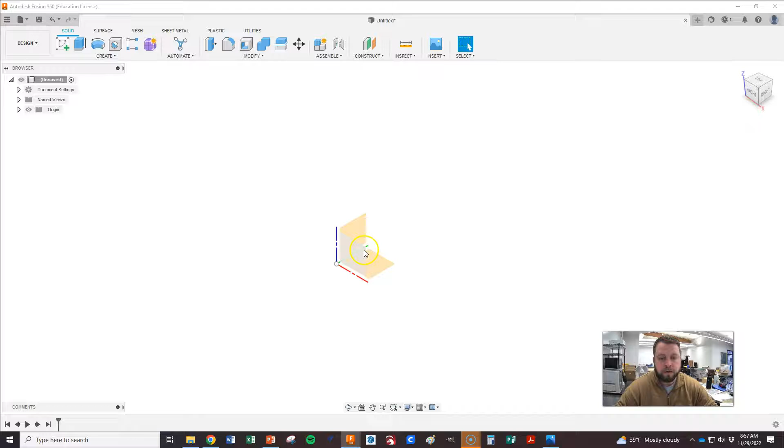It's eventually going to get extruded to 80, but for now, 150 by 20 and 60 by 20 are my rectangles I need to worry about. So I'm going to go right here. I've got my origin turned on. I'm going to right click on this front face, and then hit Create Sketch.

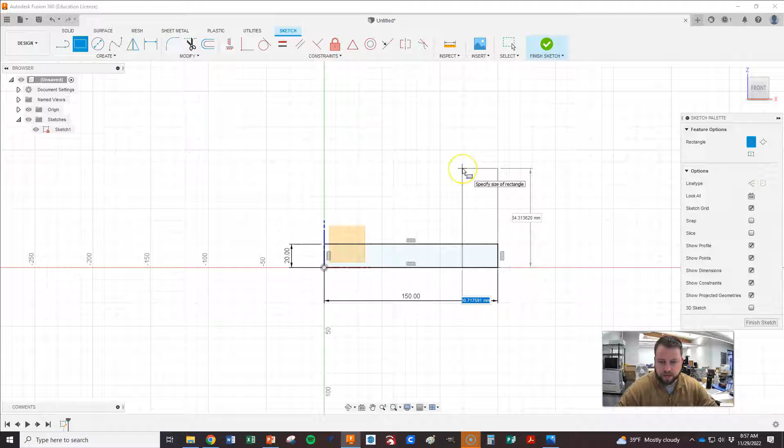Let's do a rectangle, so I hit R. Start dragging it out, I hit 150, then Tab, and 20, and Enter, and that locks that rectangle in. I'm going to right click, go up there to hit Repeat Rectangle. I'm going to go to this corner, start dragging it up, 20, Tab, 60, and Enter. Now, could I trim this out? Yeah, sure, but I want to start showing you guys some other things.

So I'm just going to hit E right there, so I'm ready to extrude that. And I can just click those, even though they're a little bit different, right? And then we'll go to Symmetric. I want the whole distance, and my whole distance is going to be 80.

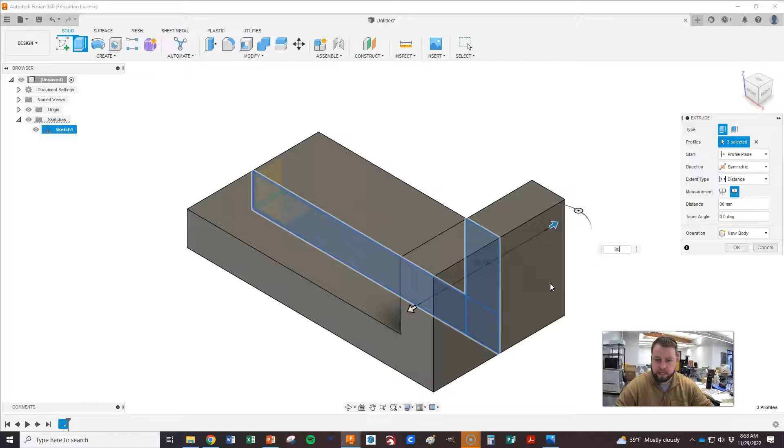Alright, now we got this thing started. Let's go ahead and put these circles here, and then these radius. My radius is 20. So let's go ahead and put our fillet on that, and that, and we want those at 20.

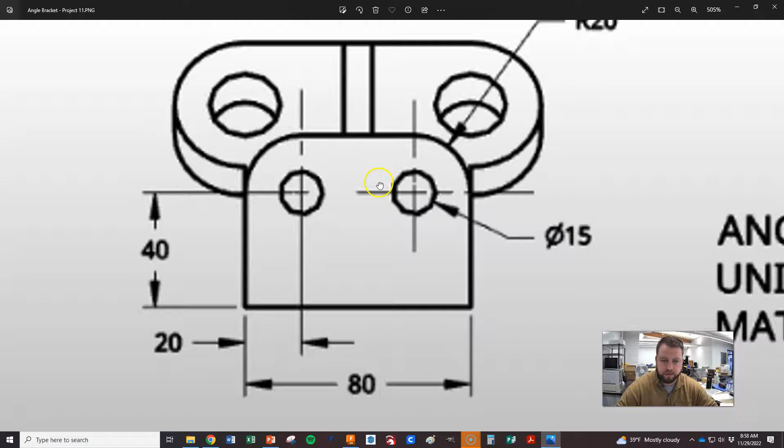Enter. And now we're going to need to create a new sketch for these holes right here. And the center point of these holes is at the same center point for this radius, right? They share the center point. So that would be right in there.

So now let's go right here, right click that, and create a sketch on that. And I want to do this, but what I wanted to see is, that's what I wanted to pop. If this didn't pop up, I was going to have to project that forward. But we're good. So that little circle there means that that's the center for those radius, those fillets we made.

I'm going to click that. Alright, I'm going to hit D for dimension. And those, what did we say, are 15.

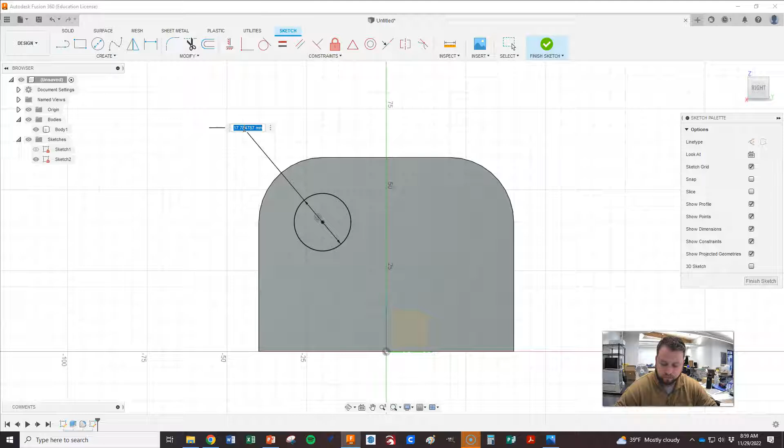Okay, and then I'm going to hit C for circle. Draw this one over there. And then I'm going to say I want U to be equal to U. And now I can hit E for extrude.

Get back in this view. I want U and U. And we're going to cut those out. So I can just hit all.

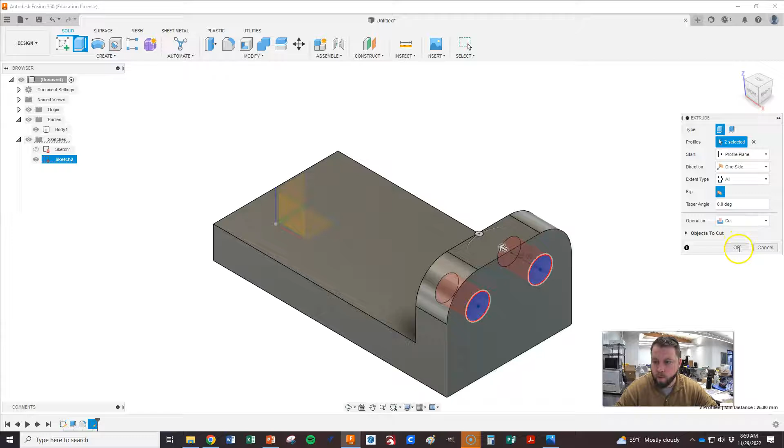And we are good. Okay, now time to worry about this whole kind of back angled piece of this. So for now, I'm just going to worry about this 60 degrees, and then we'll come in and draw it here a little bit later.

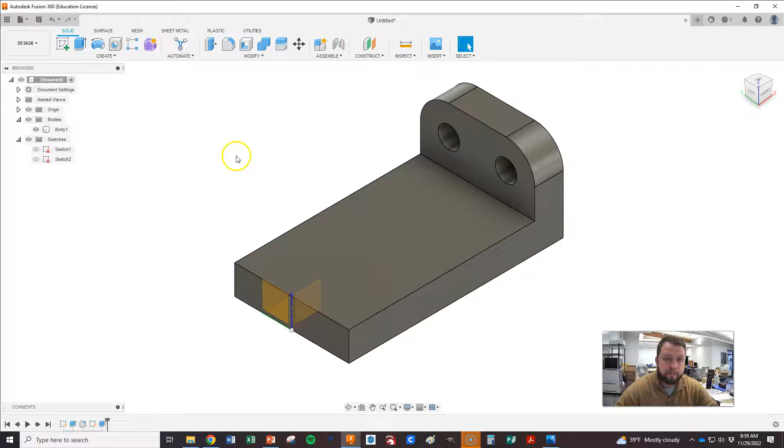And from here, I want to get so I can see the back of this. So I'm just going to click on this corner of my viewing cube. And now we go up here to construct plane angle. And we want it from this line.

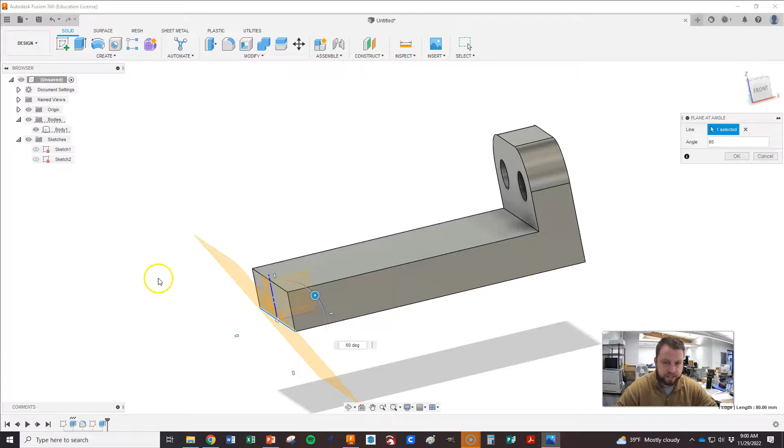And if I just kind of take this and hold shift in my scroll, just so I get a nice little side view of this plane. So I'm going to start changing this angle. It's at 60, but I want to make sure it's the correct way. So that is absolutely what we want. Let me double check that. 60, yes.

Alright, so then we want to take the surface. I'm going to right click it and create a sketch. So now I've got a nice view of this exactly how I want it to be, and now I can start drawing this angled surface.

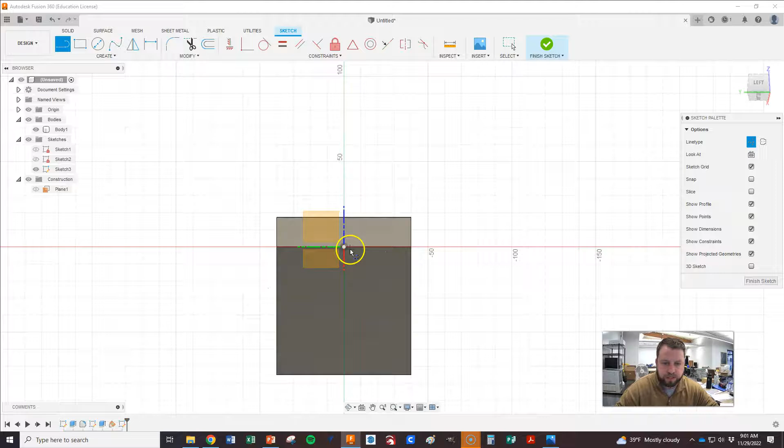95 up. So let's hit a line, and we'll make it a construction line. I'm going to start in the origin there, and I want to go up 95, and hit enter, okay? And now I'm going to hit line again, but I don't want a construction this time. Go over, and I'm going to—oh, see, that's not working right there. So I hit escape.

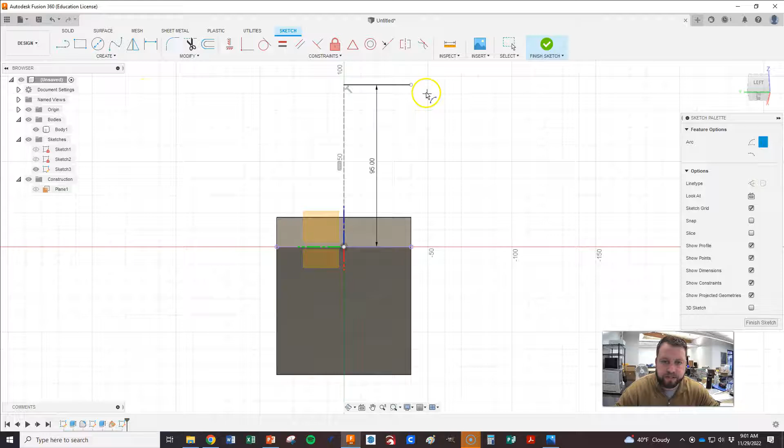And then I'm going to hit create an arc, and I'm going to use a 3-point arc since I don't know where the center point is exactly. I know I want it to start here, and somewhere down in line with this, straight down. So I'm just going to click somewhere for now, it doesn't matter where. And I'm going to pull this arc out until it snaps tangent to that top line, right there. That little symbol that pops up is what I want.

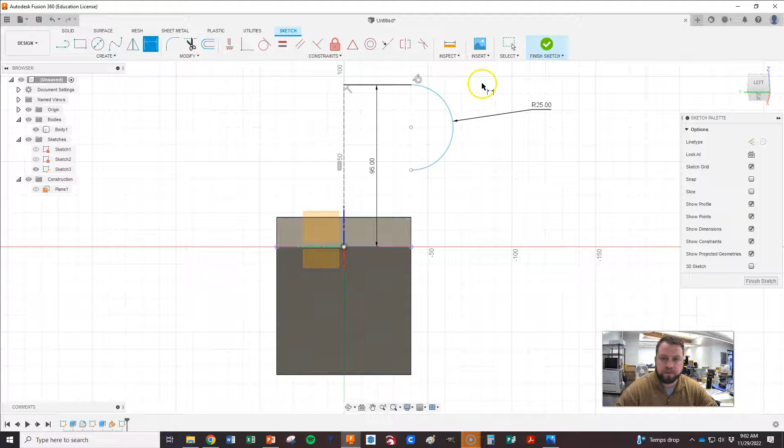All right, and then I'm going to hit dimension and give this its size. And that arc is a radius of 25. Enter. And now, I think I could still move this if I wanted. It doesn't know where I want it to be yet.

And I want all this in line here. So the first thing I want to do is tell it: this and this need to be vertical to each other. So that's now locked in place. Well, I could still move this, I believe.

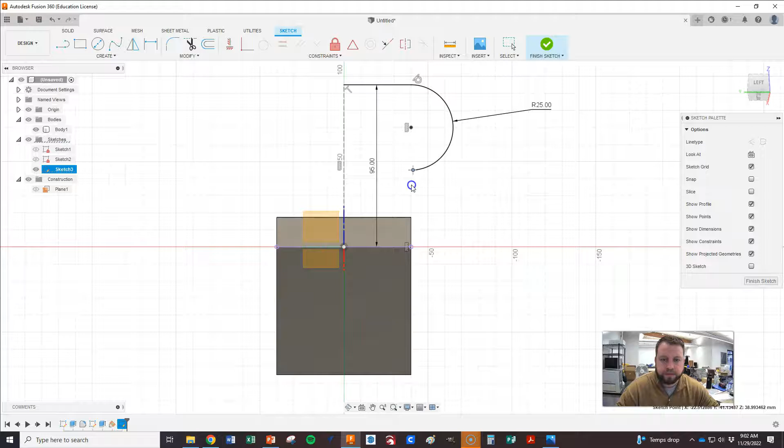Okay, so we're just going to take that in there anywhere. I'm going to hit my line, come straight up till it touches, hit T for trim, and snap that off there. And now we are good to go on that shape, and I want to mirror this over, but before I mirror it, I think I'm going to go ahead and draw that circle too.

That shares the same center point as that radius we just made, and it's a 25 millimeter diameter. C for circle, 25, and enter. Great.

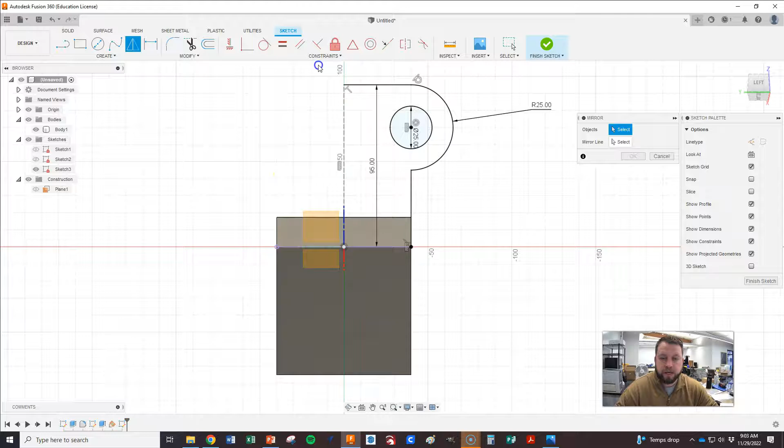We're here to mirror, and I'm going to drag it over all this stuff. I don't need this though, so I'm going to just double click on it again a second time, and it deselects it. Now for my mirror line, I'll go back and hit that construction line, and everything is good there.

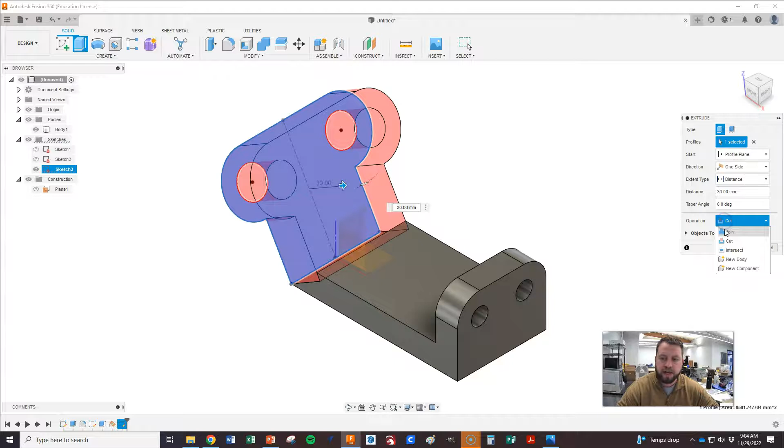So we can hit E to extrude that, bring my view back around. We're going to bring that up, and right now it's red, which means it's cutting it away. We don't want that. We want it to join in with everything else we're doing, and that is the same thickness as our other extrusions we made for the rest of the body, and that's 30. I'm going to hit OK, and now I've really got the shape of this thing going.

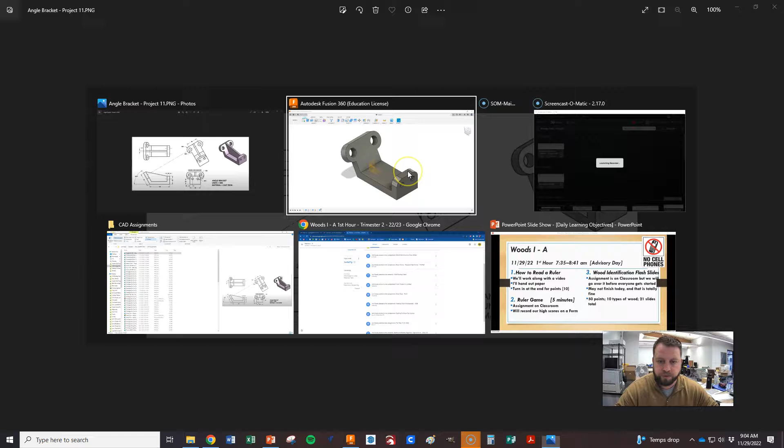The only thing that I need to add is this kind of center rib in here. And so let me show you how to use the rib tool if you've not already done that. So we want this in the middle, and that was why it was important that we put our origin where we did and then did a symmetric extrusion.

And I'm having a hard time getting it. Right there, I got it. If you can ever not get to that to create a new sketch, just a little reminder, you can always go over here and hover over things. It's not that one. There's the one. And I can actually right-click over here to create a new sketch too.

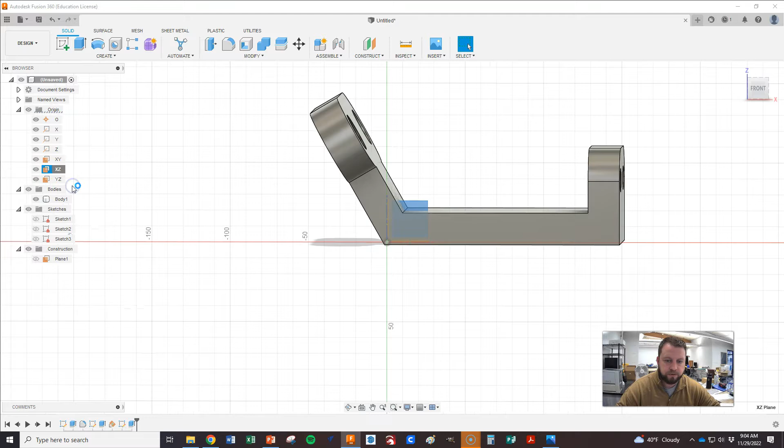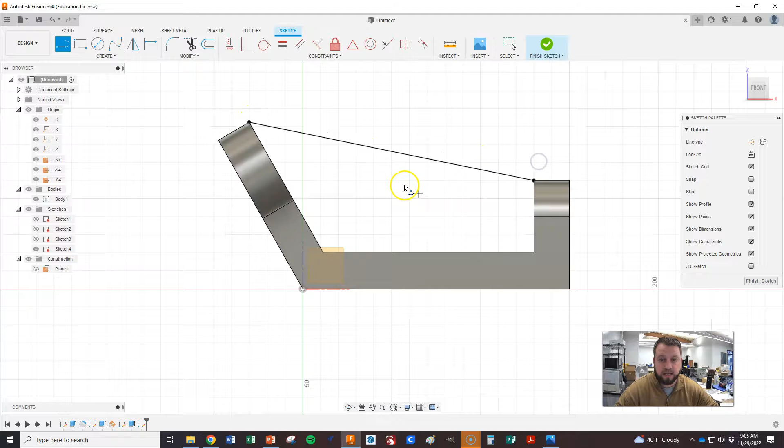And this is where we're going to need to just do a real quick operation here in order to get a line to go from here to here. Let's see if it works for us. If I hit line, it's not snapping into that point. So that's where I go back, and now I just hit P and say I need this point and this point, and I can hit OK. And now let's go back to our line tool, there to there, and that's honestly all we need, is that little line right there. Finish sketch.

And we're not going to extrude this. What we're going to do now is create a rib, and it asks us what profile. Well, that line I just made. Okay, and that rib needs to be, where does it tell me? There it is, 10. Okay, so I'm going to type in 10.

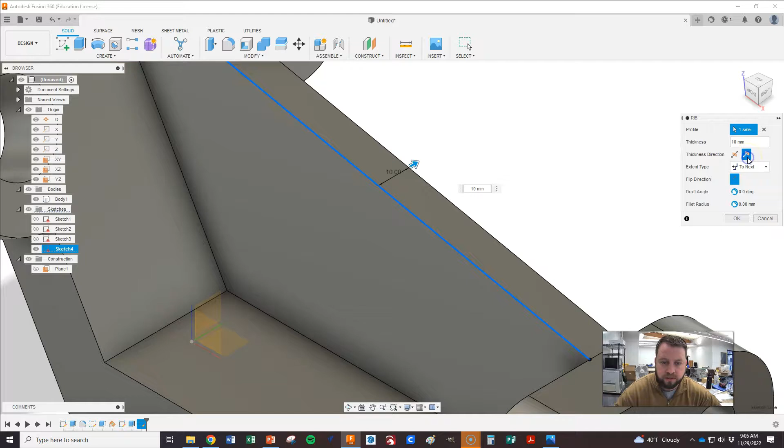And you can see it's kind of on the wrong side of the line I drew. So that's what's beautiful about this little dialog window over here. I'm going to flip the direction, so I just click that, and bada bing, bada boom. And you can see that it's going both ways, right? So it's the total thickness. You could change that if you want it to be one side or the other, but we want it kind of as a symmetric rib. And that's exactly what we need. We hit OK, and there is our part, all done.

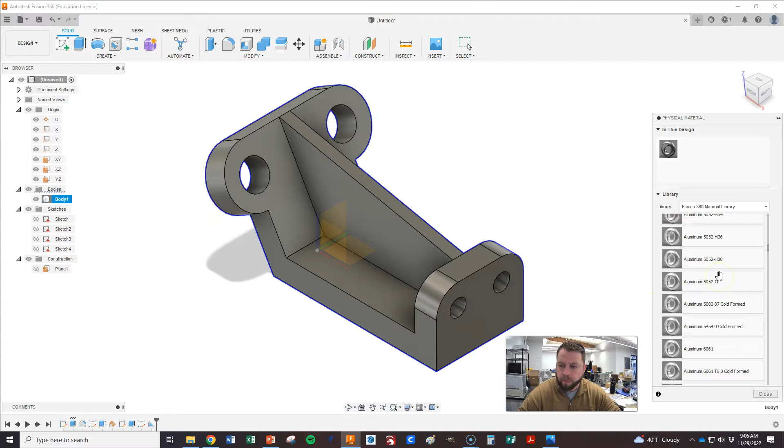So last thing, let's go back, and they use cast iron. I believe we have that as an option. So we can go over here, our physical material, metal, and begin scrolling. There's our cast iron. So we'll assign it to cast iron, hit close.

I like that appearance, we don't need to change that. I'm going to turn my origin off there, and I think that looks good. And then I'm just going to open up my properties, click off of it. There's a pretty good view of our part, and you guys are all set. All right.